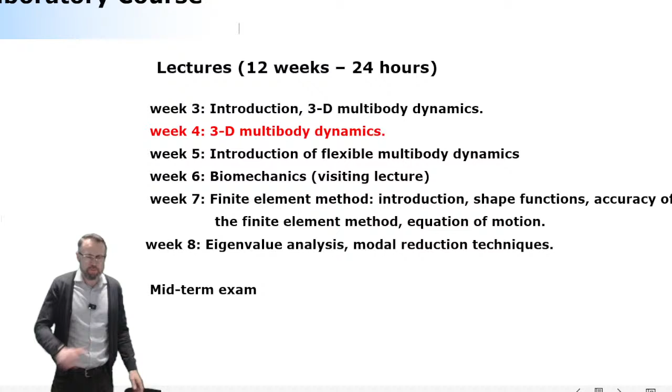Okay, so that's next week. This week we're going to close the discussion about three-dimensional multi-body dynamics. That's where we're going to close the case. And I think if everything goes as planned, we'll have time to start the introduction of flexible bodies, just a little bit of warming up. Then the real deal will be when we jump into the finite element method.

Finite element method - I know you are aware of the method, but I would like to explain it differently than what you've used to deal with. Because I know you've learned the method with nodes, and between the nodes there are springs. That's not the way I'd like to introduce the finite element method, but something different. What is this something different?

We'll get back to that, if not today, then next week. Week 6 is a little bit inconvenient timing because then we're going to get the visiting lecture about biomechanics. That's exactly in the middle of the story of flexible multi-body dynamics and finite element method and so forth. But time-wise, that was the only possible week available, so I need to apologize for that.

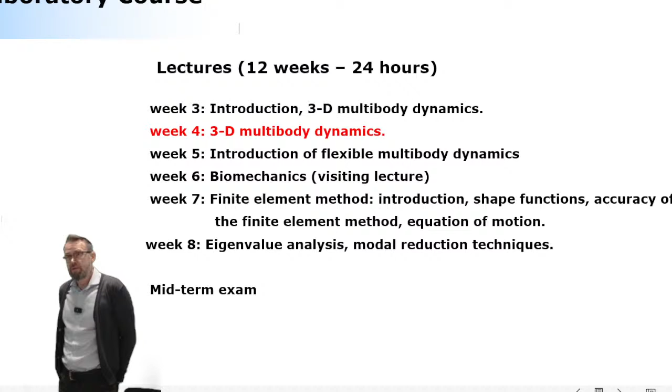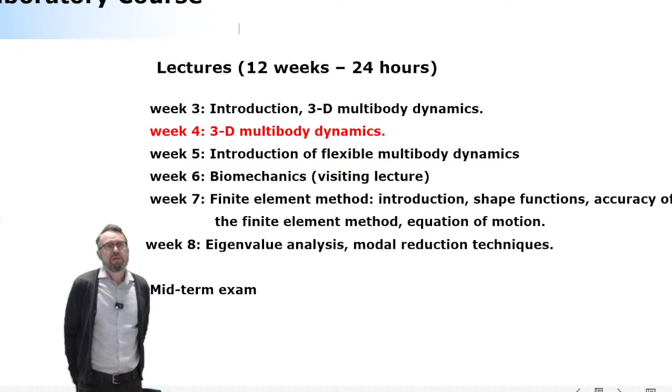All right, so 3D multi-body - this is not even that much multi-body, but it's kinematics. Three-dimensional kinematics. But before that, let's look at what we discussed a week ago.

A week ago we discussed, sorry these screens are a little bit inconveniently located - here's one screen that seems to work. What about that, is there something there too? That's okay too. Okay, so we discussed how we can describe a particle in spatial applications, in three-dimensional space.

We learned that we want to use a body reference coordinate system that is attached to the body, so it's welded to the body. It cannot move regardless of the case - if the body moves, the body reference coordinate will do the same. If the body rotates, the body reference coordinate system will do the same. So they are inseparable, they are the same thing, completely rigidly attached.

When we make use of this body reference coordinate system, it simplifies the description of particles within the boundaries of the body. Because within the boundaries of the body, we use vector u bar that is constant, since these particles are unable to move relative to each other. That's simply because we are assuming the body to be rigid, and that's where the assumption comes from.

First we need to describe where the body reference coordinate system is located, and that's described using vector r. Then we need to take its orientation into account, described using this 3x3 rotation matrix - seemingly simple, but in theory very hard to understand, hard to deal with.

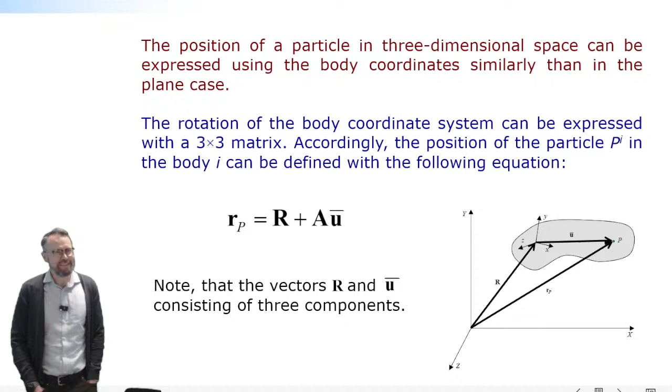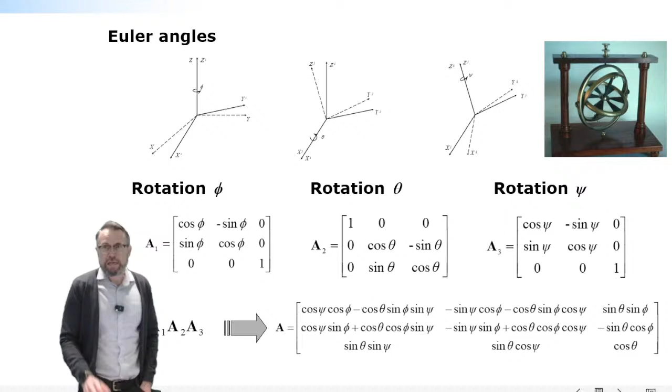Okay, now. So here's 3 parameters. Euler angles is one way to go. It's based on successive rotations — one rotation after another rotation. That's what it is. Then there's the method based on 4 parameters.

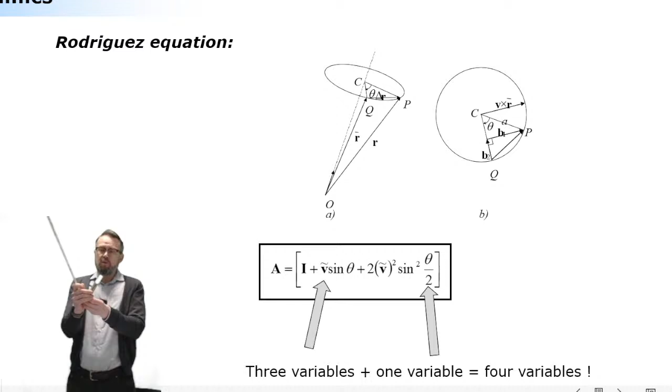A good example is the Rodriguez equation, which is based on 2 vectors. One is the vector that you wanted to rotate. To make the rotation take place, you can introduce an assisting vector that is unit in length. Because it is unit in length, unity is the constraint here, because these vector v parameters cannot be selected randomly — they have to be unit in length. So then you're welding these 2 vectors together like this, and you need to introduce a rotation amount of theta.

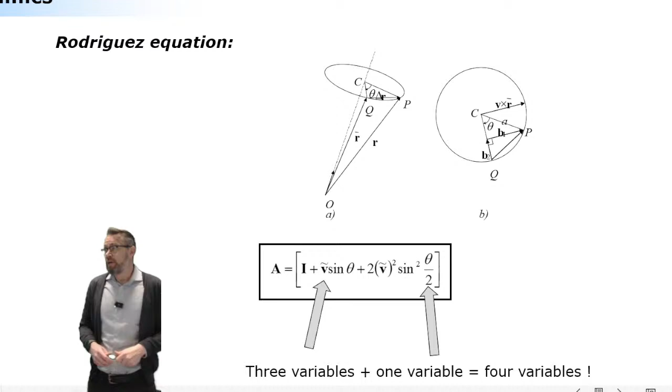After heavy mathematical manipulation, you're able to express a 3x3 rotation matrix that consists of 4 parameters: 3 because of the unit vector v, and 1 because of angle theta. We use the skew symmetric form, which is an alternative for cross product. The skew symmetric form is a little more pleasant for matrix manipulation, mathematically. It's nothing too special. So here is our 3x3 rotation matrix and the constraint that needs to be fulfilled.

It's kind of a funny story. Some 25 years back, when we made the first code in multi-body system dynamics, we decided to use Euler parameters. And what we were missing at the time was this constraint. Each of the bodies were behaving in a really weird way.

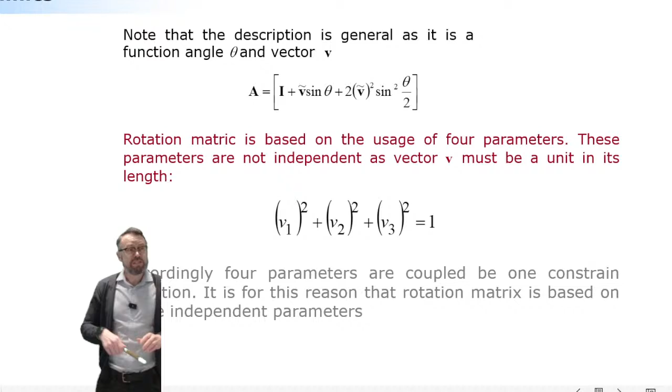We started with a simple pendulum, and when the pendulum started to rotate, its length became much longer than initially. We were like, oh my God, did we invent it so that this is a flexible body? No, we didn't — it was just a mistake in the code, and that mistake was a missing constraint. The constraint wasn't there.

All right, so here's my first in-class quiz. In the Rodriguez equation, rotation is described by 4 parameters, and these 4 parameters are coupled because angle theta is small and vector v is unit in length — we are assuming the body to be rigid. Or: parameters are not coupled, because the body can rotate in 4 different ways.

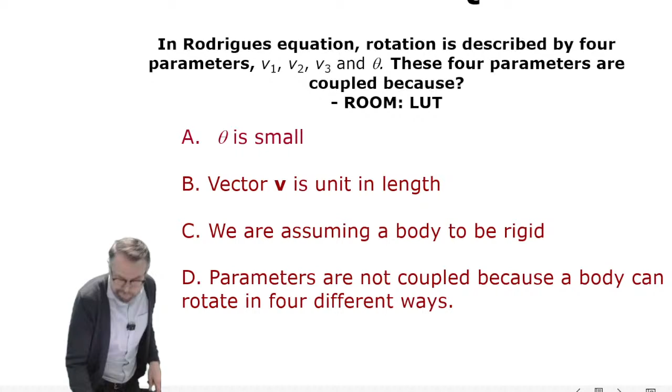All right, next is another way of describing rotation, called Euler parameters. It's almost the same as the Rodriguez equation — it's just a name game, really. We want to call the different parameters by different names, and this gives us something called Euler parameters. Now, what seems close to each other is Euler angles and Euler parameters, because of the name Euler.

But actually, these 2 methods have nothing whatsoever to do with each other. There is, of course, a link you can build from one method to another, but conceptually they are very different — one is based on 3 parameters, that's Euler angles, and the other is based on 4 parameters, which is Euler parameters. So they are conceptually very, very different.

Now, Euler parameters work such that we can substitute this — and again, I don't have my pen with me today — this trigonometric relation into this 3x3 matrix.

Once we do so, the 3x3 matrix can be written like that. What I'm going to do is start calling these components by certain names. Those names will be Euler parameters. That's a trick that I'm doing here. Here, in the upper right corner of my slide, you can see the 3x3 matrix.

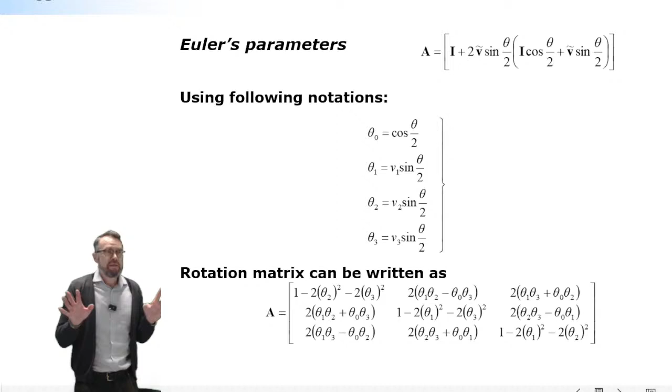Now, once using this name game and substituting these names into my 3x3 rotation matrix, located again in the upper right corner of my slide, I'm going to have the matrix written below. No trick, just a name game. Nothing but the name game.

That's how it is. Now, again, we have 4 parameters, so I still have to have a constraint of some kind. I cannot select these 4 parameters as I want. That's obvious because remember what's behind these names. Behind these names is still our good friend, vector v. It's still there. If you look behind the scheme, behind the names, the components of v are still there. So v still needs to be unit in length.

That's going to be our constraint. But this time, we're going to express this in a little bit different way. We're going to say these parameters, the vector of these parameters, need to be unit in length. That's our constraint. That's a simple game. So that's another way to express the rotations.

Okay, any comments, questions so far? How does it sound? It's like, okay, pretty okay. We went through this fast, but I think you need to just memorize the concepts, nothing but the concept.

Next time when somebody comes to say that they're going to describe bodies using 4 rotational parameters, don't say you're wrong, because a body can rotate in 3 different ways - that's what is often used in practice. Most of the modern engines, if not all, are based on 4 parameters. All these commercial software are based on 4 parameters because they are mathematically so pleasant.

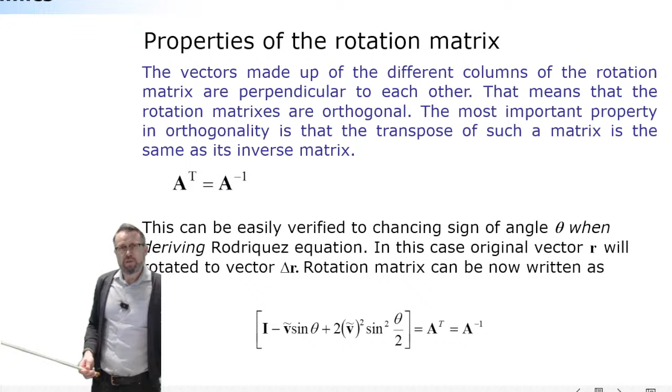And because of orthogonality, the transpose is the same as the inverse. You can do the test by changing the order to be reversed. So if you first rotate the vector r like this, you can rotate it back. You notice that the only difference is the transpose. So that's it. Okay.

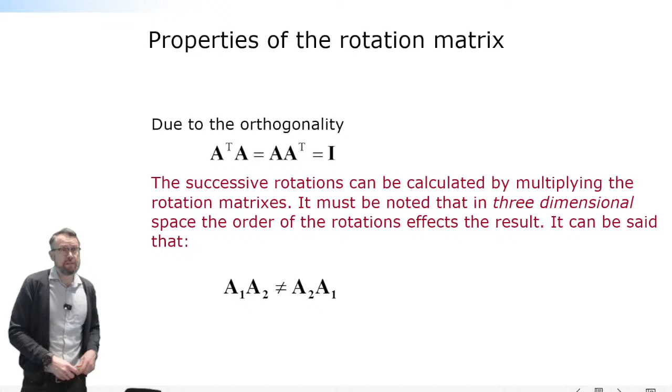Because of this orthogonality, a matrix multiplied by its transpose is going to be the identity matrix. An identity matrix is one where the diagonal components, in this case a 3 by 3 matrix, are all ones. In three-dimensional space, the order of rotation cannot be changed. In the planar case you could, because there's only one way the rotation can take place, but here you cannot change the order. Good to keep in mind.

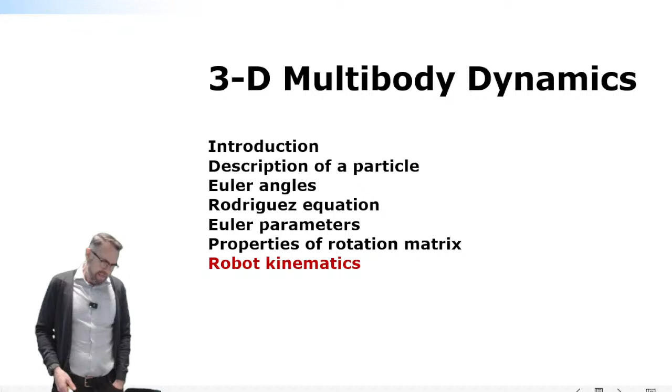Let's discuss shortly about robot kinematics, and then we're going to move on to something a little different. Any comments so far? All clear? How come I have a little bit of a hard time believing that? But you say no questions. Maybe not clear, but no questions this time. Would that be a better interpretation of your face? I know it's a university rule that you're not allowed to interact during the lecture, but what about this: if it's clear, do like this, if not so clear, do this, if you're very confused, do this. So which one is it? You're confused. Okay, so you're okay. It's okay, everything seems to make sense. All right.

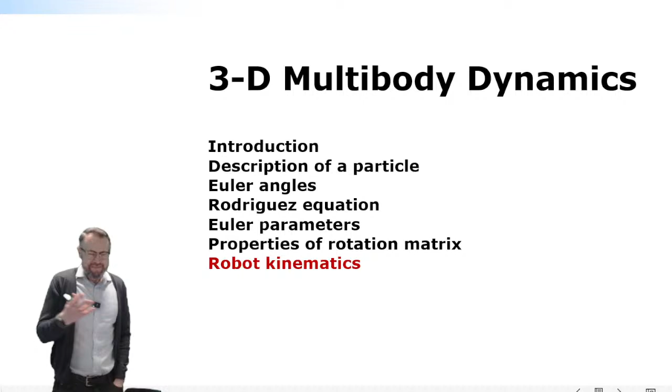Okay, robot kinematics. Here are the questions: how the 4x4 matrix presentation can be used in robot kinematics. This is something that is standard procedure in robotics, and you might have already heard about it if you've taken any classes in robotics, since these classes usually start by explaining the kinematics, which goes by a 4x4 transformation matrix that explains the kinematics of any robotic system. I wanted to explain how that is related to what we have learned so far.

What's the difference between what we have learned and the 4x4 matrix? They're not really different. It's a bit of a name game, and then we're going to use the Denavit-Hartenberg method, which is the most often used 4x4 transformation matrix method, based on 4 parameters. Once you know these 4 parameters, you can create the kinematics automatically. This is a very straightforward way to build the kinematic relations. But again, it's kinematics only, not dynamics. Remember, kinematics is the art of motion—it's not about forces, it's about how things are moving.

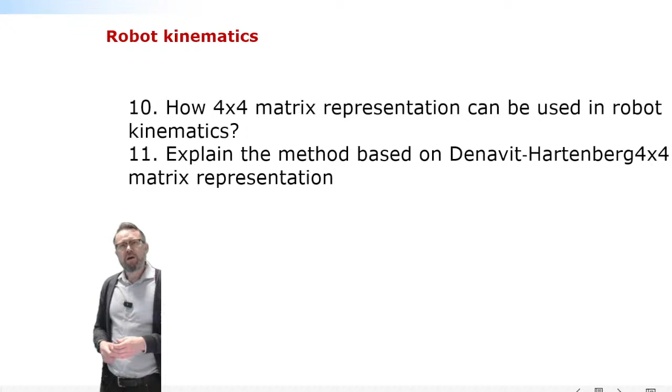So, the 4x4 matrix. This is a typical robotic system consisting of several different arms. What we can do in these arms is move from one angle to another by multiplying these 3x3 matrices—this is how we can travel. One thing not accounted for if you just use a rotation matrix, which is 3x3, is the length of the body. You don't know that. You actually know the orientation of the end effector—the end of the robotic arm, where you do the gripping or grasping—you know its orientation, but you don't know its location. And of course you need to know both, otherwise you cannot make use of this information. So with multiplying 3x3 matrices we know the orientation, but we need a little bit more.

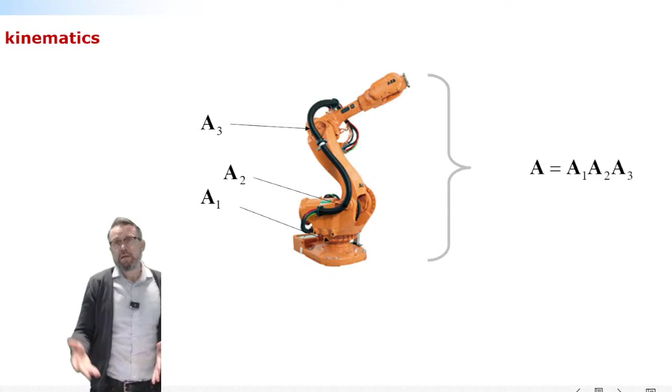And that's where the 4x4 transformation matrix method comes into play, and it can take the translation into account—similarly to how we move from one rotation to another, from root to the end, the same way we just take the translation into account.

All right, robotic systems—one observation is important. Robotic systems have a little bit of different problems than anything else we've discussed so far. It's different because typically what we want to know in a robotic system is: what is the length, where should the body reference coordinate system be transformed in terms of the reference coordinate system, and what's its orientation supposed to be to reach a certain place. Because robotics is all about—okay, I want to touch this point. Let's say I have here a fixed point and I want to touch the end of the pen.

This is what I wanted to do—touch it with this configuration, this location. This is what I wanted to do. Tell me, how can I make this happen? I need to know the angles of each of my joints to make this happen. And not just to touch it once, but often there's a trajectory, some kind of path that you need to follow.

How you can follow this path, the one I'm doing with my finger, by adjusting these joints in my arm. This is very natural for a human, but a very complicated thing for a robotic system, for one reason.

And the one reason is redundancy. Redundancy is the fact that I can put my finger in this configuration by using multiple different angle configurations. Look at this, it stays in the same orientation, same place, and I'm changing my angles.

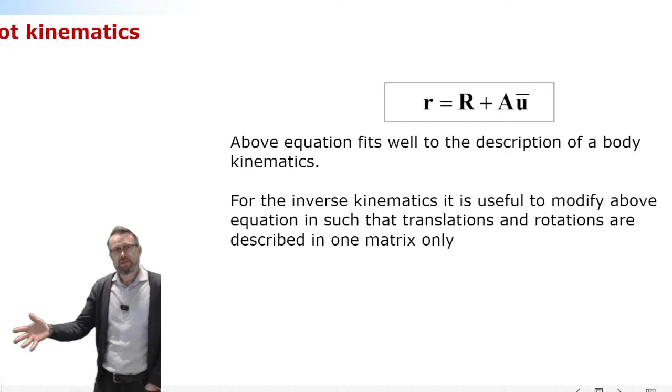Now we use this equation, translation plus rotation. That's not very good for a robotic system because we'd like to combine it. So how to combine it? That's straightforward, let's reorganize the components that actually matter: the 3x3 rotation matrix and the translation vector, described by vector R. Those are the components that matter.

Let's take these two components and substitute them into a matrix that is a 4x4 transformation matrix. The rotation matrix will be located at the upper left corner, occupying the first three columns and first three rows. That's what it's taking away.

What is left is one entire row and one entire column. I'm going to take my vector R and locate it in the upper right corner of my 4x4 transformation matrix. Now what's left is a single row needed to match the dimension, so let me fill that with zeros, except the diagonal component, the last one of that row, which I'll put as 1.

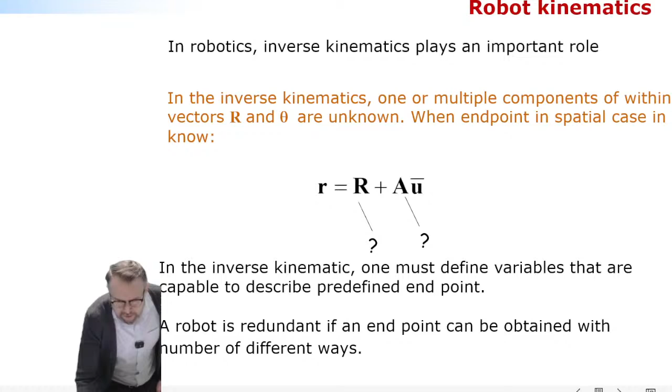If you really want to know where the end effector is located at, you need to know two things: translation and rotation. Now we saw that if you know the rotation, you know how is the orientation of the end effector. That's not enough, so we need to know also where that is located at. It's orientation and location, and when we combine them, that gives us automatically what we need.

And now what we're going to do is this: instead of using this rotation matrix, we can use a transformation matrix for each of these joints. And once we do that, then we know the location and orientation of the end effector. That's what it's doing for us, so it's actually giving us the kinematics as a whole.

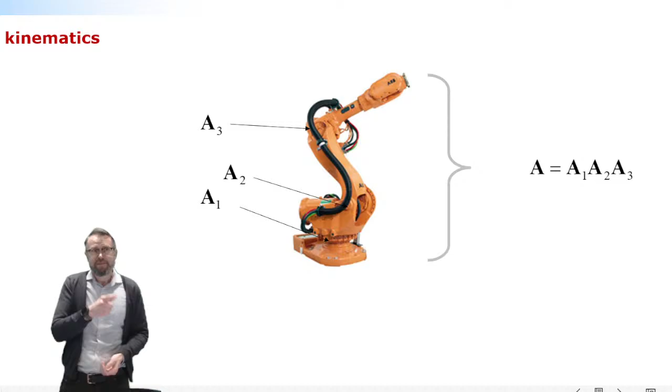These kinematics can be used for other purposes too. You can use the kinematics to figure out the singularity configuration - a real singularity configuration, like if there is a possibility that your mechanism can get locked, your kinematics will tell that to you. And that's going to be based on this 4x4 transformation matrix. Nice question. Okay, let me explain this a bit further, and then I will get back to you.

Now, here's an example. This is pretty much the same example we did using the multi-body approach. We have body B here that is rotated 30 degrees with respect to the global coordinate axis Z, and this is the only rotation that took place. Coordinate B is also translated 10 units along the x-axis and 5 units along the y-axis. Tell me where this one point is located at, and I can figure that out by first creating this 3x3 rotation matrix, then taking the translation into account, and then forming the P vector.

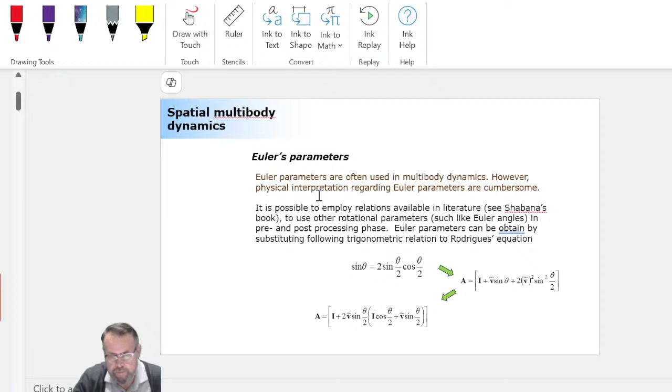Sorry that I don't have my pen with me today, so I cannot really highlight what is what. I can try. So Mustafa, tell me if it's not looking good anymore. This is not good. No, I just cannot do the drawing today. Not possible today, sorry about that. And you don't see that well anymore, so I realize that too. Okay, let me take it back. Now let me take it here. All right, we are back here. So I cannot make a drawing, but let me use my mouse to explain this to you.

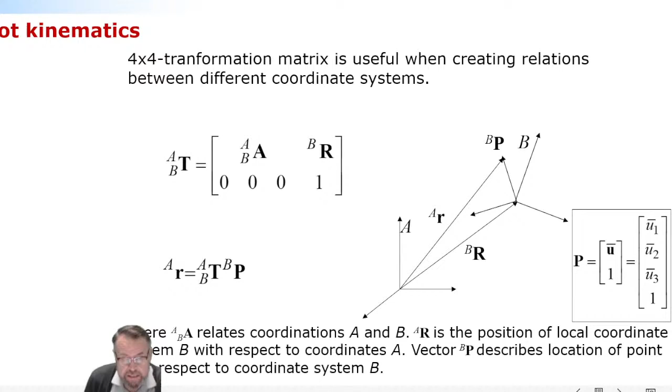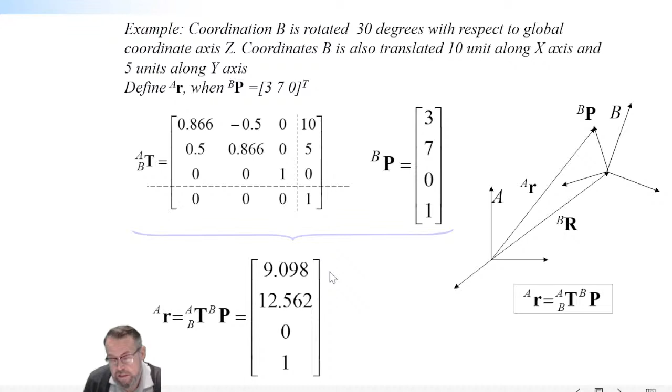So what we did in this numerical example was this: we took this rotation matrix, we place it here, okay? Then we use this translation, we place it here, and then we build the vector U bar, and this is telling us the final location, okay? Orientation we know already because we know how it is rotated. And here comes this magic thing.

So now what we can do with the help of these 4x4 matrices is move from one body to another by multiplying these 4x4 matrices together. So let me correct - each of the arms, each of the bodies of the robotic system will be described by one 4x4 matrix. You keep on multiplying these matrices together so you can move from one body to another, third, fourth, fifth, and so on and so forth until you reach the end.

And now once you do the multiplication, this tells you automatically where the end effector is located and what is its orientation. That's what the kinematics is about. Now that's the beauty of the method. So it's a kinematic description of not just a single body, but an entire robotic system.

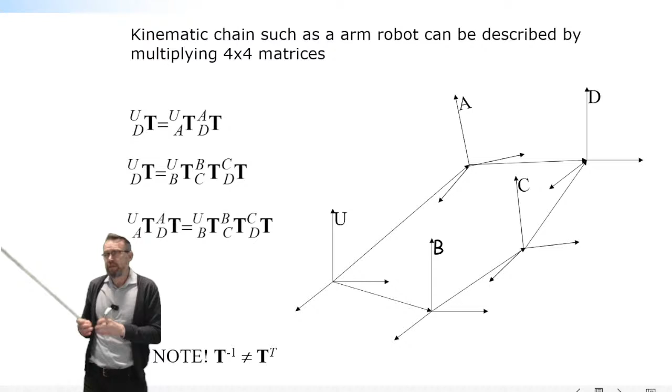This becomes even more useful when we use the method called Denavit-Hartenberg. Because here, the problem is that we're assuming one body versus another can translate in three different ways and rotate in three different ways, so there's a total of 6 degrees of freedom. That's not the case in robotics. They can only move with respect to neighboring bodies in a certain way because of the constraints, because of the joints. And because of the limiting motion possibilities, this becomes very useful. Make sense?

Okay, so here it is. So this was the 4x4 method. And now I'm about to explain this method called Denavit-Hartenberg. Denavit-Hartenberg is a method where we are not taking all possible translations and all possible rotations into account, but limited ones. Actually, this is a method that consists of 4 parameters only, and with 4 parameters you can create the kinematics for each of the robotic systems. Once you do that, your kinematics is done. So it's an automated way to create the kinematics.

And now if you differentiate your kinematics with respect to your angles, and you can do that using a symbolic math tool, you can figure out the singularity configuration. So all of that becomes quite handy.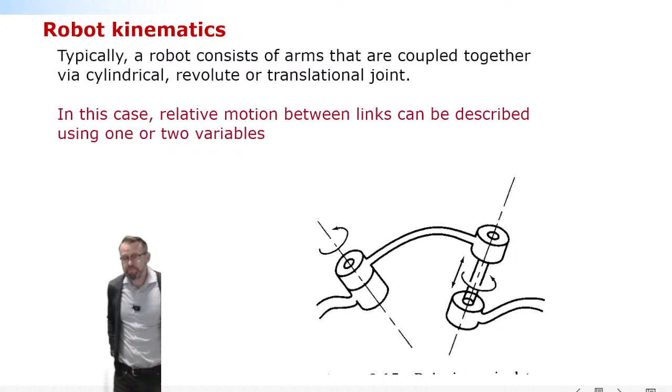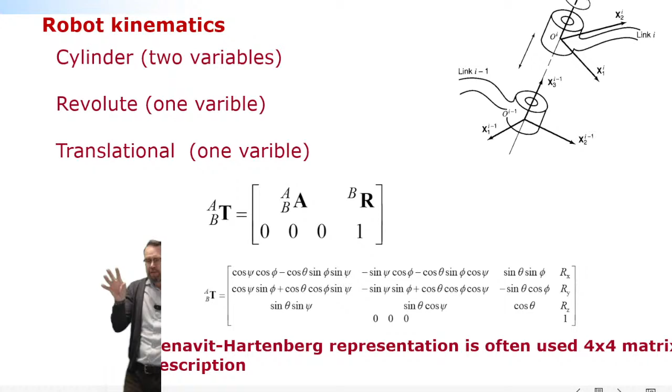Okay, now, 4 parameters, because we need to look at what are the typical joints between the bodies, and it's going to be such that we deal with a limited number of joint types. We're dealing with cylindrical joints, revolute joints, and translational joints. Those are the things we're going to deal with. And of course, we need to take the body length and possible twist into account. Each of these matters can be accounted for using 4 parameters like this.

Okay, so it's not so easy to read, some of the figures are not clear, but I hope you understand. The first parameter is A, the length of the body, measured as the normal of the z-axis. So this is the kind of length of the single arm, how long it is.

It's called A. The second one is alpha, and alpha is how much these are twisted. So if you have this kind of arm, the length is going to be A. And if the orientation of this end and this end are the same, alpha is going to be 0. If they are 90 degrees apart, it's going to be something else, and so on and so forth. So that's what it is about.

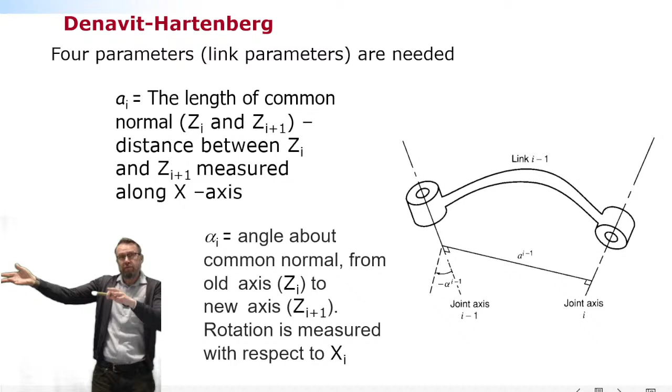Okay, 2 more parameters are missing. 2 more parameters are the distance from revolute joint perspective, from one joint to another. If you look at this figure, which I'm unable to draw clearly, but let me use my mouse here, this is about D, how much they are separated like this. So this is going to be the D parameter, and the last parameter is going to be angle theta, how much angular difference they have in the original configuration. These are my 4 parameters.

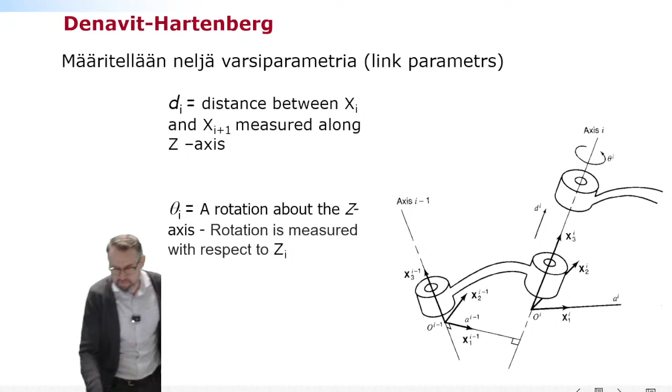And with these 4 parameters, what I'm going to do next is create a 4x4 transformation matrix for each of these parameters using a substitution technique, nothing but substitution. I'm going to take my Euler angles, substitute this information into them, and it's going to give me 4 different 4x4 matrices. Once I multiply them together, that's my kinematics.

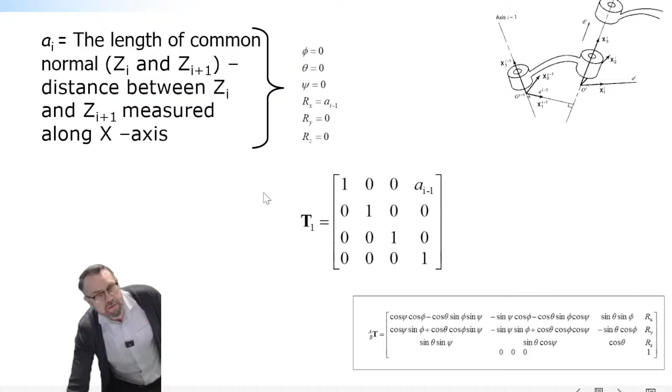Okay, first parameter is this. I'm using multi-body interpretation here. I'm saying the length of the body is obviously a translation with respect to the Rx direction. Once I substitute that information into my 4x4 matrix, this is how it looks. All the other parameters are zeros.

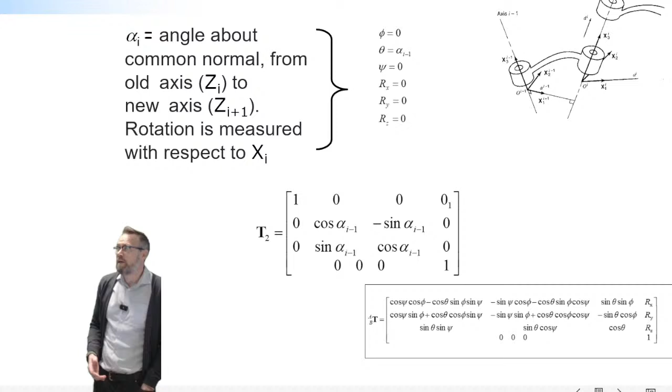And I'll do the same for the angle. Now this one angle, for my Euler angles, is going to be angle theta. Look at that, how beautifully I pronounce my angle theta. So it's going to be angle theta, equal to that angle alpha. All others again are equal to zeros. Once I do that, this is how the 4x4 matrix looks.

And then the distance D. The distance D is going to be this one here, the last component here. It's going to be located here.

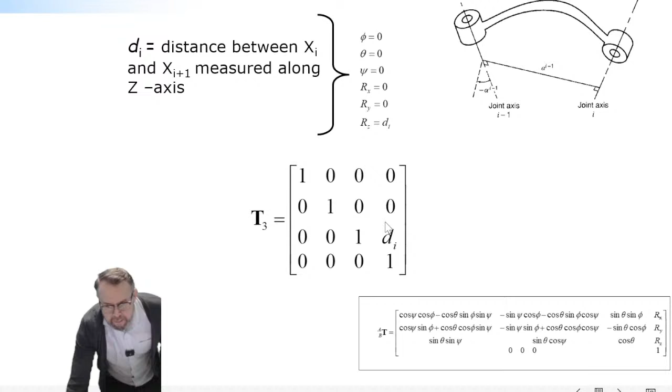Last one is again rotation, and this rotation is angle theta. Correct, yes, that's what it is.

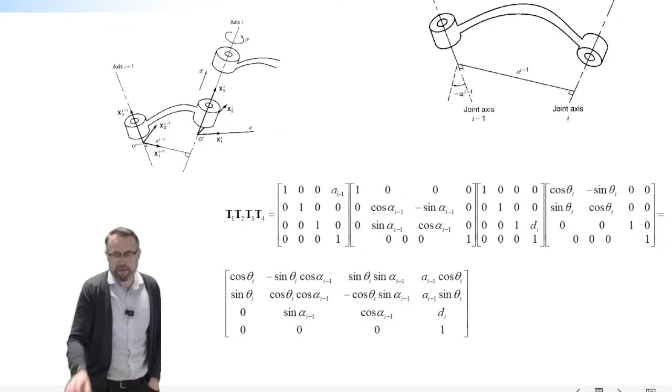And now this time angle C is going to be called angle theta, using the name tags we just introduced. And again you get this 4x4 matrix. Only thing left is to multiply them together so we can take each of these motion possibilities into account. Once you do it, this is how your matrix looks. So this is a 4x4 matrix, consisting of 4 parameters.

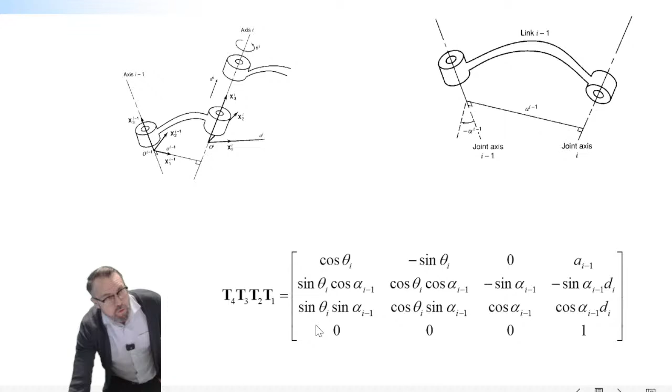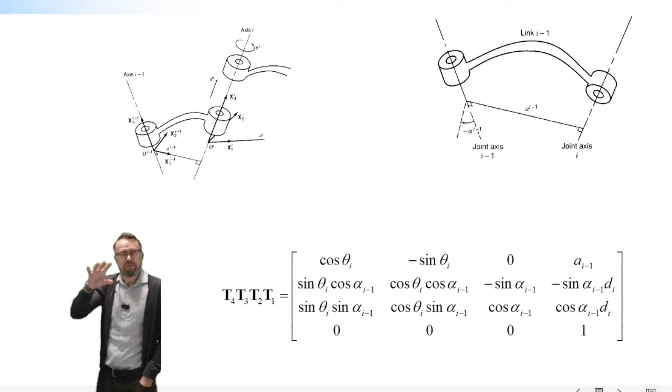How does it work? You take your robotic system, keep these 4 parameters for each of the robotic arms, put it in a table, and once your table is ready, the kinematics will be created automatically. That's how it works - an automated way of describing the robot kinematic system.

Okay, let me practice. So here is a not too complicated robotic system. And by the way, the beauty of this method is that it's a spatial method, so it takes 3-dimensional rotations into account.

Okay, what do you guys say, should we have a very small break? Would that be okay? Because I'm a little bit in a hurry right after this lecture, I need to go have my lunch. And that's a big deal of course - not the highlight of my day, because lectures always highlight my day, but still you need to have lunch to survive. So would it be okay that we go over this story about Denavit-Hartenberg, then a very small break, and then close a bit before noon.

It's okay, sounds okay. Okay, here is my robotic system. Consists of 2 arms, and actually you see this is nothing but a double pendulum, not too complicated robotic system. So this consists of two bodies, okay?

So what I need to do is create the table with 2 rows, one for each of the bodies, body 1 and body 2, and each of the rows has 4 columns. These 4 columns are the DH parameters for body 1, and the DH parameters for body 2. Once I do that, and do the substitution, then my kinematics is done - my kinematics is made, all right?

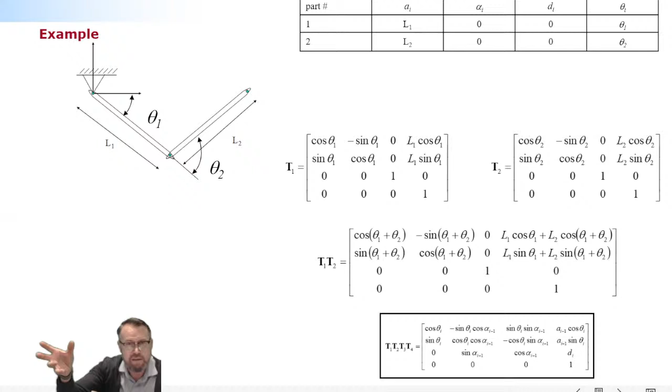What about alpha, how much they are twisted? Remember this twisting thing - not twisted at all, because they have the same orientation at this end and this end. This is 0. This distance, how much they are separated in this direction - they are not separated in this direction, so that too is 0. And then comes the initial configuration angle theta.

So it's going to be this one here, all right? Same, so this is another relative thing. This is something I did not mention clearly, but these are always relative coordinates with respect to the body before you. So this is how you describe these parameters.

Again there's a length, this is 0, this is 0, this is describing the relative angle here between body 1 and 2. This is my first transformation matrix, this is my second transformation matrix. This corresponds to body 1, this corresponds to body 2.

You do the multiplication - this is your kinematics. This tells you the orientation, this tells you the location. Kinematics done.

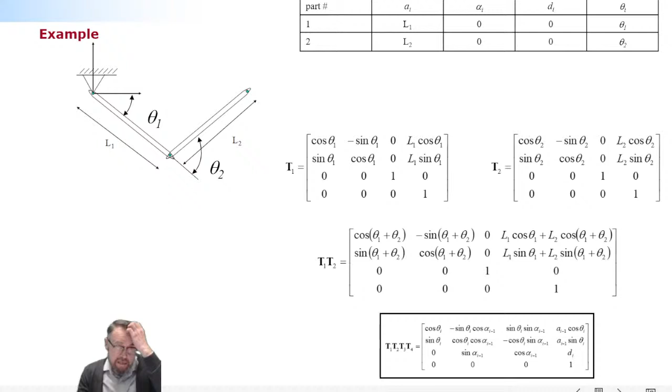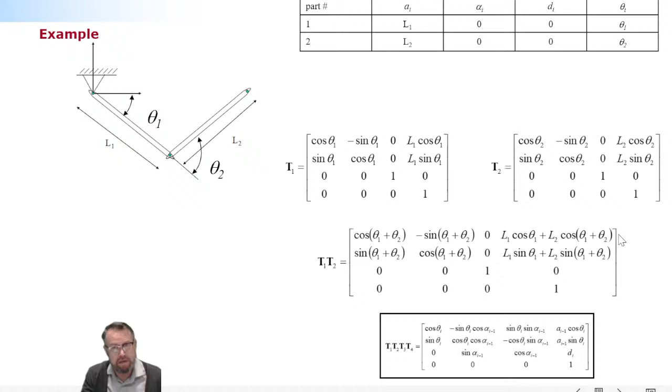Now if you suspect there is a singularity problem, what you can do is take your symbolic math tool and differentiate this 4x4 matrix with respect to your angles. This is going to be your Jacobian. And then you can compute the determinant of your Jacobian, and that tells you quite a bit about how healthy your mechanism, your robotic system to be more specific, is. Okay, that's what it is.

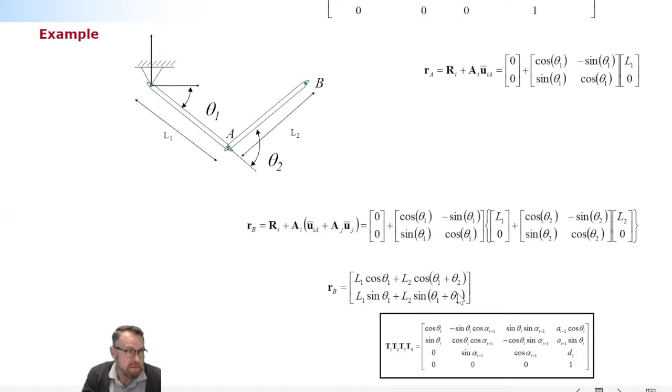All right, now I redo the same using my multi-body approach, using relative coordinates. I'm using this equation, but this time it's a relative coordinate, so I need to use this rotation-after-another technique. I'm not going into details here because you guys will get the slides later, and if you want to familiarize yourself with the detail, you can do that a little later. And I get the same result, same end configuration. Okay, that's how it works.

Now, how much time do you need to recover? 5 minutes? Okay, 5 minutes. And then we're going to close - we can close 10 minutes to noon, or even maybe earlier than that. Okay, so 5 minutes.

Okay, let me mute myself. Do you want to mute first? Sure. Is it this? I think it is.

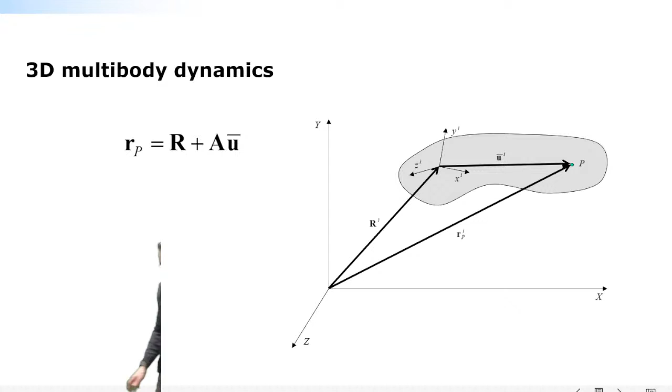I realize that I'm not as fast as I would like to be, so I'm running a little behind my original plan. Anyway, I'm gonna do this 3D multi-body dynamics fast, because pretty much the information I wanted to give you is this: if you have 3 rotational parameters, regardless of your choice of rotational parameters, once you differentiate those with respect to time, they are not equal to angular velocities. That's a major headache, and this requires special attention, which typically is something users are not so familiar with.

Why is this a big deal? It's a big deal because, to keep certain parameters of the model, it makes a lot of sense to use a local body reference coordinate system. So it makes sense to give an inertia tensor, which represents how much something resists rotation, with respect to your body reference coordinate system, because otherwise it can be complicated. This mismatch needs to be taken into account.

We're going to shortly explain this mismatch to you, and that's it. We'll leave it there and move on to flexible multi-body dynamics, which is an entirely different field, because the assumption we've used extensively so far, that particles cannot move relatively with respect to each other, is no longer valid in deformable bodies. Think about this end and this end - this length is no longer constant because of the deformation; it changes as a function of time or deformation. That's significant, and it changes everything we've learned so far. That's where we make use of the finite element method.

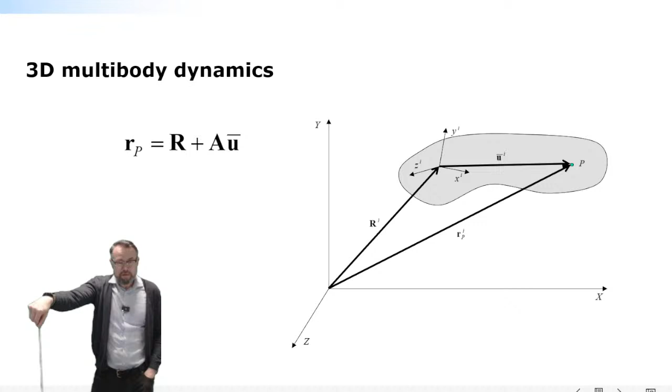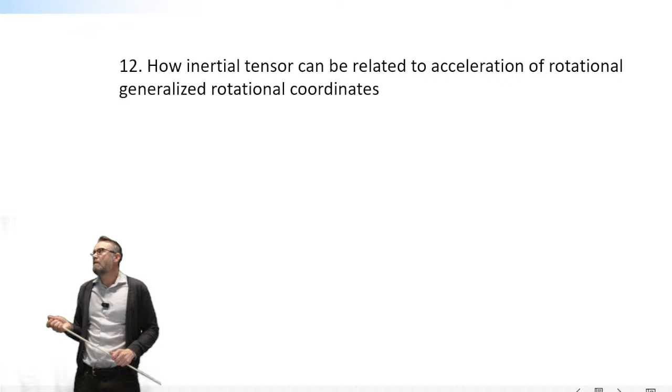Okay, very good. So, 3D multi-body dynamics - there's one question only: how can the inertia tensor be related to the acceleration of generalized rotational coordinates? This is a little redundant with 'rotational' said too many times, but that's my question. It comes from the relation between your angular velocity and rotational parameters - that's where it's coming from.

All right, so this is a bit of a warm-up. Once we look at the velocity of a particle, it can be obtained by differentiating its position with respect to time. Once you do that, you get 3 components. One of them will be equal to zero - the one in the middle. Why? Because the vector u-bar is constant if the body is rigid.

So if the body cannot deform, vector u-bar is constant, and once you differentiate it with respect to time, it disappears. What's left is the translational velocity plus a term that comes from differentiating your 3x3 rotation matrix once with respect to time - when you do so, you get the angular velocity. This angular velocity can be with respect to your global coordinate system, denoted as omega-tilde, the skew-symmetric form of the vector. Without the bar, it's with respect to the reference coordinate system; with the bar, it's with respect to the body reference coordinate system. The difference is whether the angular velocity is expressed with respect to the body reference coordinate system or the reference coordinate system.

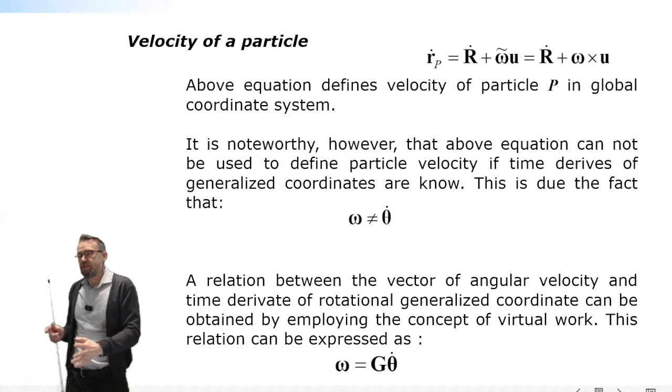But here is an important thing: never, even when you use 3 angular parameters, never assume that it's the same as angular velocities, because they are not. They are not. They can be related with help of G matrix, and that's pretty much what I wanted you to know. How they look if you're using Euler angles with the rotation sequence we've been discussing before.

G matrix looks like this. If you take a close look at the G matrix, it's actually rotation axis. Rotation axis. Because when you look at the first column, that obviously is the z axis, z coordinate axis. And if the angle phi is equal to 0, the second one is going to be the x-axis. If the first rotation and second rotation are equal to 0, the third one is going to be again the z-axis. So that's where they're coming from.

Now, in a general case, you cannot even tell where they come from because they are so case-dependent, depending on what you wanted to do. But my point is this: once you have the G matrix, you can do the relation, and then you can explicitly express generalized coordinates in terms of your velocities. You can do the same for acceleration. And now it becomes possible to relate whatever computation method you're using, whatever parameters you're using, to the inertia tensor that is expressed using your body reference coordinate system.

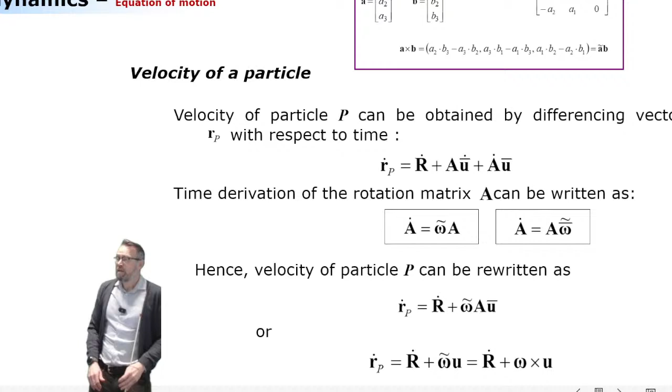Because of physics - because of this planet, because of the Earth, I don't know where this is coming from, because of the way we describe the kinematics - angular velocity is not the same as time derivatives of rotational parameters, but they can be related, they can be linked. And the way we're going to link them is with help of the G matrix. This is a necessary step, because otherwise our kinematics is expressed without knowing what the generalized coordinates are, or velocity of generalized coordinates, because that's the one we wanted to solve. All the time we wanted to solve the unknowns, which are generalized coordinates.

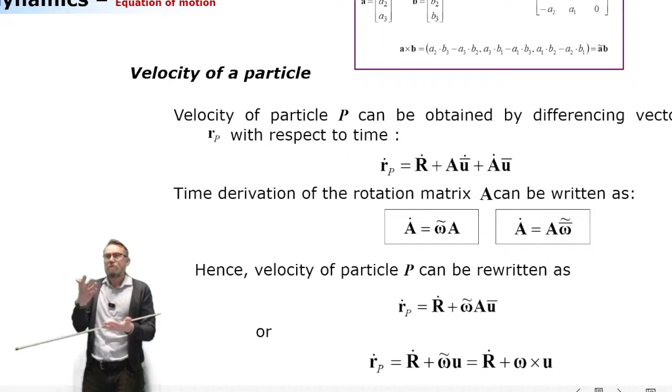Okay, I said that I'm going to be fast here. Now, this is what the G matrix looks like. So now with help of the G matrix, I can relate my generalized coordinates and angular velocities.

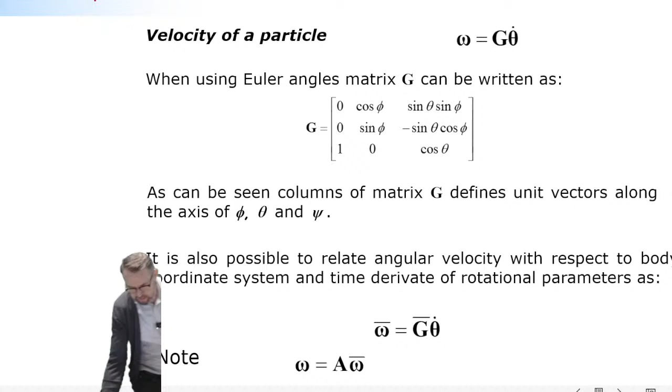And now we're going to go back to the in-class quiz. My in-class quiz is this. So let me see if you guys have enough information to answer this. Matrix G is important because it couples local and global coordinates. It couples angular velocity vector and time derivatives of generalized coordinates because it describes inertia properties of body, couples global and generalized coordinates.

I don't know, guys. Do you have enough information to answer this question? Do you know what's the correct answer?

Hey, why don't we do the following? I'm going to put this on, but before entering your answer, you need to discuss with at least 3 fellow students. You are not allowed to answer before communicating with 3 members of this class. You need to make an agreement, because otherwise we are not going to have a great success rate.

Okay, so here's... are the online participants able to see this? Can you check? Yeah, there have been no comments. Can they see this screen? Not this one, not this one. They still see the slides.

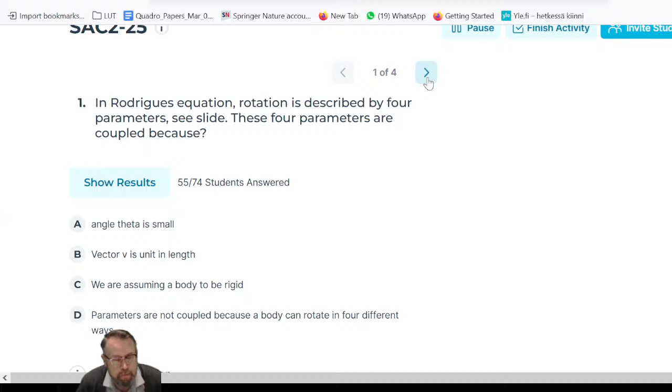Okay, we're moving on to the next one. Why is the G matrix important? Because it does what? Again, don't answer right now, but first communicate. Make an agreement, make an agreement.

Okay, you guys are absolutely sure what is the correct answer? Okay, then you can go. If you're absolutely convinced that you know the correct answer, then you can enter it. And I'm going to take myself back here, this one. You good?

Not yet. Okay, what about the back row? What about Team Finland? Team Finland is convinced. Team Finland is having a can-do attitude. Nice, very nice. What is another team in the back row? What's your, rest of the world?

Okay, so this becomes interesting. Team rest of the world is saying yes, we know what is the correct answer. Okay, fantastic. Rest of the world, I like that. So it's Finland against the rest of the world. Well, that's a challenge. No pressure to Team Finland at all. No pressure, but it's our reputation, Finnish reputation, on the line. It's a big deal.

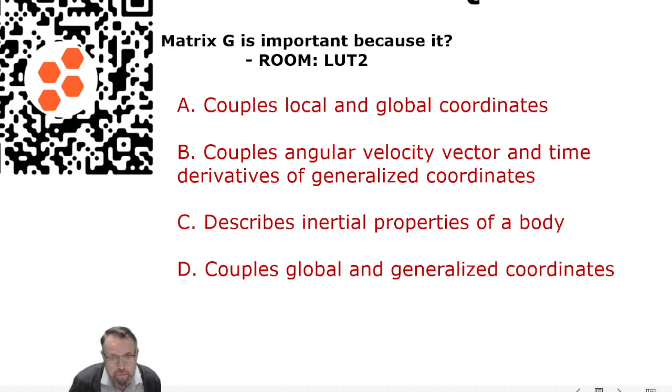Okay, we're going to move on to flexible bodies. There are a few things that I would like you to be aware of regarding flexible bodies. There are two more in-class quizzes. I don't know if we really have time to do so, but I hope we do.

First thing important to understand: flexibility is needed to increase the accuracy of the model. Sometimes the flexibility of the body is so significant that if you make an assumption about rigid bodies, the results are going to be a poor representation of reality. They don't have a close relation to reality. So it's a clear way to increase the quality and accuracy of your model by increasing the description of flexibility.

But here comes the difficult thing. There have been serious attempts to make some kind of rule of thumb for when flexibility needs to be described. So when is the flexibility significant enough that you should take it into account? That's impossible to say, there's no way to say. Sometimes it's said that if you can see with your bare eyes that the structure is slender, that's enough. But that's not enough, because it needs to be highly loaded to make the deformation significant. Sometimes it's said, okay, if the lowest natural frequency is within a certain range, that's another reason you need to take flexibility into account. But there are always exceptions. You can always set these rules, but then there's an exception of the exception. Honestly, there's no way to know.

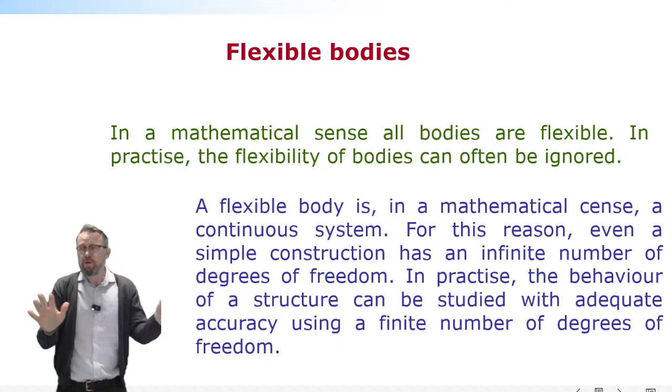Here's my next in-class quiz: when does deformation need to be accounted for in multi-body applications? When large force is applied to the system, when the natural frequency is low, when slender, thin structures are considered, or is there no general rule to make this decision?

And I'm going to take myself to this one, and the next one is on. We're going to take a look at this, and then I'm going to tell you one more story. Okay, take a look at the options, and you're welcome to communicate again. As soon as I see that you are not communicating anymore, then I'm going to move forward.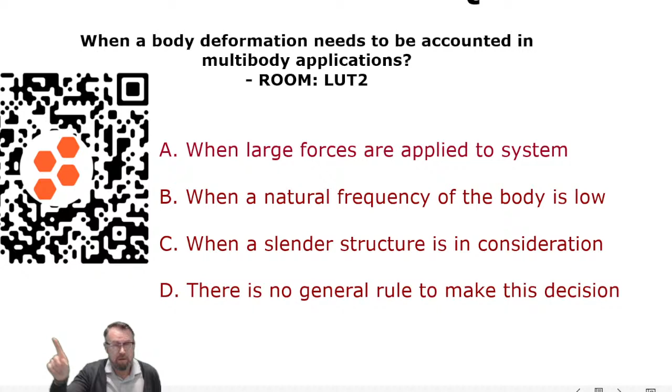This is something I explained earlier. The field of flexible multi-body dynamics means that the flexibility of the body is taken into account. There are two families within this framework, and they differ in how they account for deformation - whether you take large deformation into account, or limit yourself to small deformation. This all comes down to how you relate displacement and strain.

I apologize that I'm unable to make drawings, but displacement is how much each point of a cantilever beam has moved from its original configuration. That's what displacement is about. Strain is how much the material is experiencing strain because of this displacement.

This relation can be linear, which is a very common assumption, or it can be nonlinear. They have a completely different way of describing things, because if you describe this relation as linear, it means second order deformation is not accounted for.

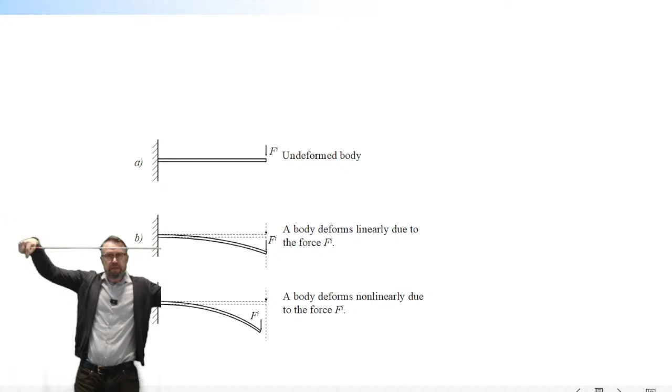Second order deformation in the case of a cantilever beam means that if you look at the free end, when you're loading it, the loading end stays in the loading line, which is okay if the deformation is small. It becomes very unnatural if the deformation is large, because the deformation would then be something like...

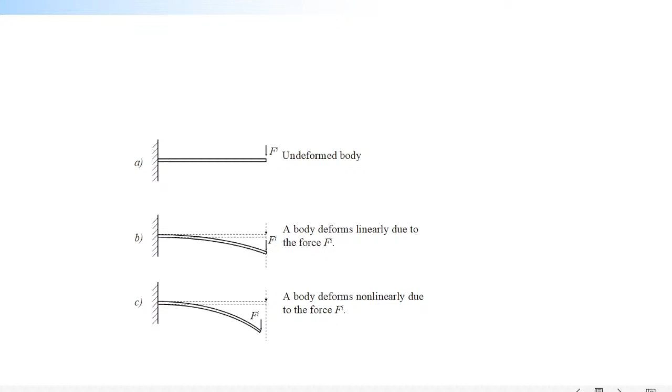When you have the free end, if the deformation looks like this, that's not happening in reality. This is not the case. In reality it will be something like this. You can only take this into account if you assume the relation between displacement and strain to be nonlinear.

This has very severe consequences for how things are described mathematically. These are two different families - that's why it's like a large deformation family and a small deformation family within the field of flexible multi-body dynamics.

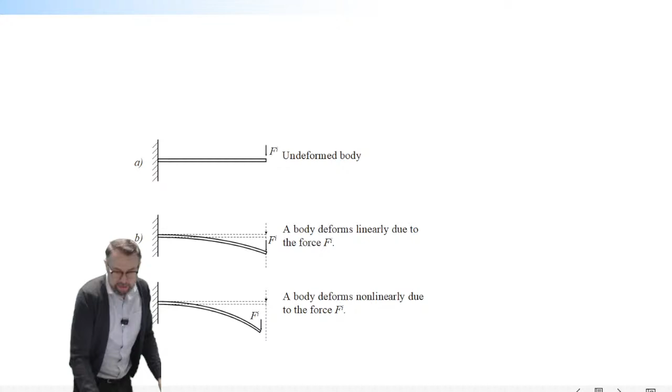We're going to focus on small deformations. That's where classical finite element methods focus too. Okay, so that's how it is.

This is what the animation looked like last year too. There are two cantilever beams, one with an assumption of linear strain-displacement relation, another one with a nonlinear one, and obviously the one where the pendulum at the end of the cantilever beam goes in all possible directions is the one where the nonlinearity is taken into account.

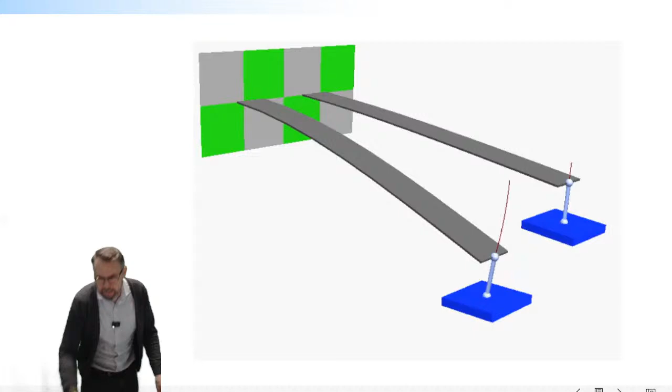Now I'm going to tell you about the lumped mass approach, and one more time I'm going to emphasize something called a mathematically stiff problem. Then we're going to go have lunch.

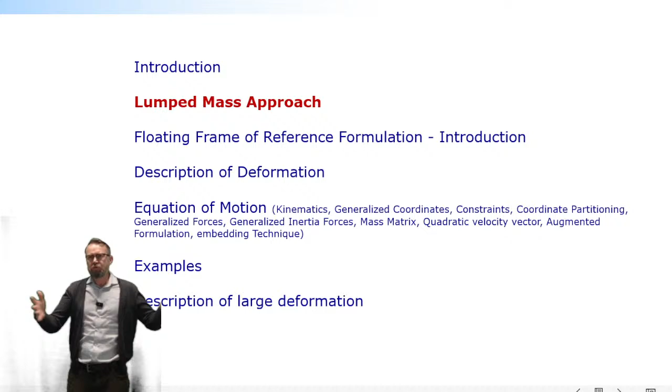The lumped mass approach is a way to describe flexibility in a not-too-sophisticated way. It's based on the assumption that a flexible body is described by a series of rigid bodies connected together via springs - almost an application of rigid bodies. So if I have an original beam-like body, instead of using one rigid body, I take multiple rigid bodies, each connected together using spring elements.

This is a nice approach, but it comes with the problem of numerical stiffness. Numerical stiffness doesn't mean something is physically stiff - it's similar to how membrane locking is not a mechanical lock. It means this easily leads to models where you have high frequencies and low frequencies in the same model, and this is always something you want to avoid numerically as much as you can.

And the reason is this: when you look at the response of a system with high and low frequencies, the overall behavior may look like this beam bending in a certain way. But when you look closely, the system might recognize there's a very small vibration with insignificant amplitude.

For example, in the axial direction, the system is moving in an insignificant way. But because it recognizes there's some kind of movement in this direction too, it gets alert - 'there's something going on in this direction' - so it makes its time step small enough to see what's going on, because integrators generally cannot differentiate what's significant from what's less significant.

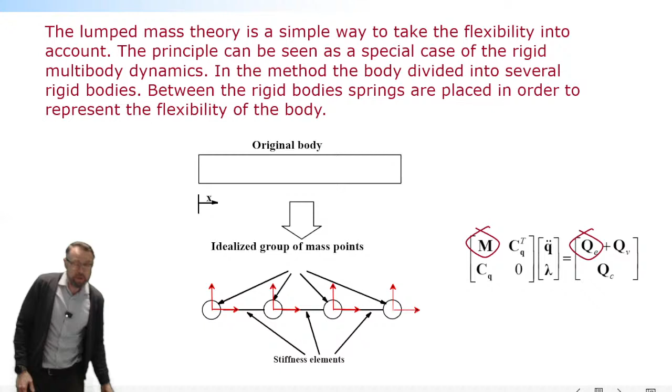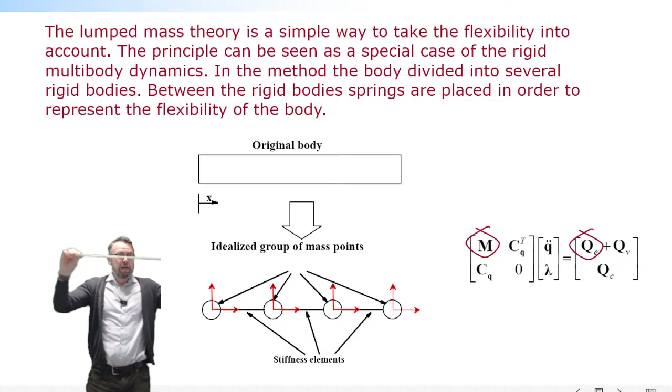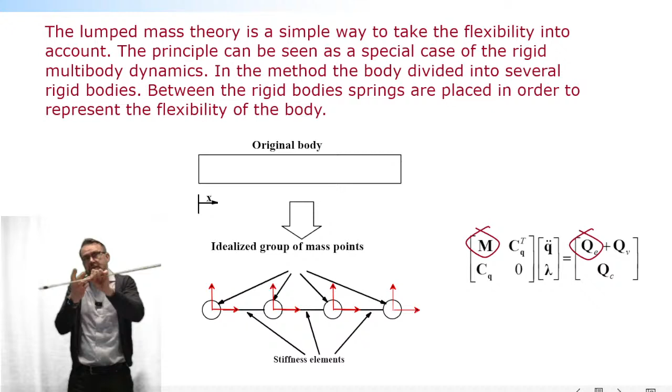I'm going to make an additional drawing on that next week, but that's something that is a problem when you use this method. You see that because of the bending, when you have these lumped masses, it will actually have somewhat low frequency. But because it can also move in the axial direction, there's going to be quite high frequency related to that. Or let's say neighboring two masses are moving relatively with respect to each other, very high frequency. This is something that you want to avoid as much as you can, because otherwise computational efficiency is going to be low.

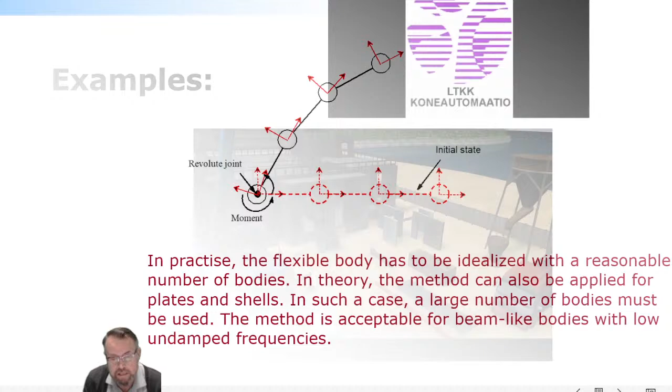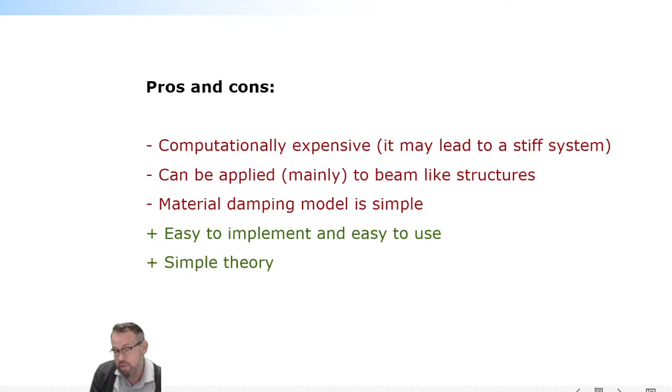All right, so my last in-class quiz is this. There's going to be a bit more about how this behaves, some animation examples, computationally expensive because of the stiff system, can be applied for beam-like structures only. Material damping is somewhat simple, easy to implement, easy to use, simple theory.

My last in-class quiz is this: what does numerically stiff system mean? That the system contains low and high frequencies, that the system contains high frequencies, that all bodies are assumed to be rigid, or that some of the bodies are assumed to be flexible.